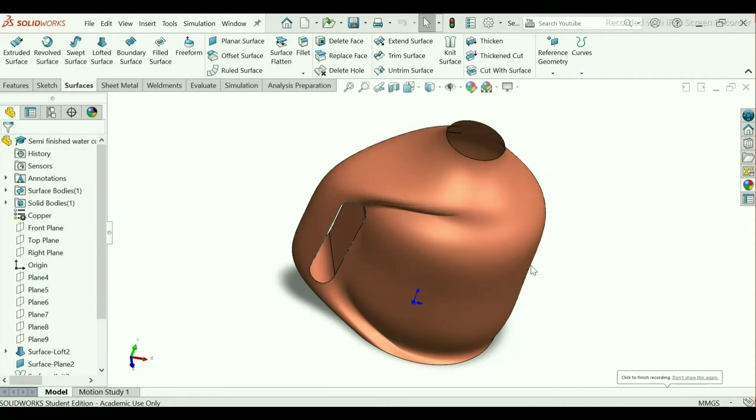Welcome to my channel. Today I will make a semi-finished water container that you are seeing.

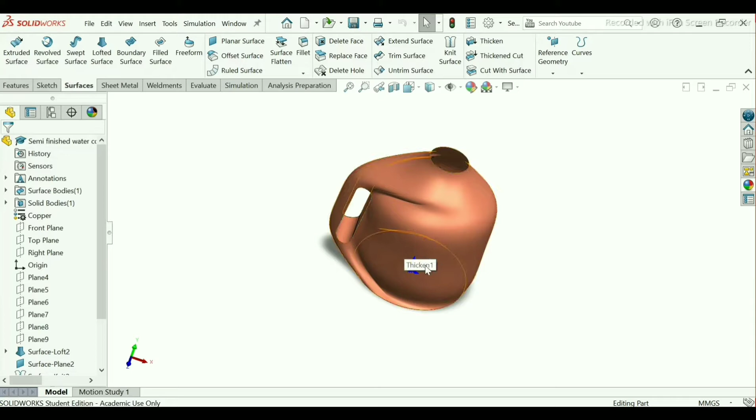In this video I will show you how to use the loft surface command. Here are some planes that I have created, and I will show you the 2D sketch of it like this. We have to draw and create the planes here to make this using the loft surface command.

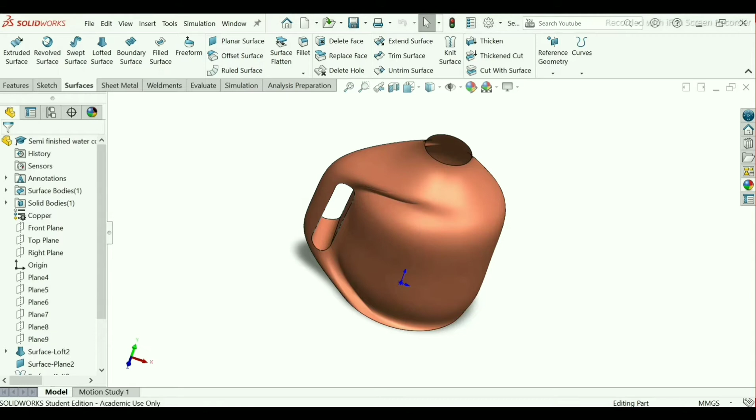If you have seen this, let's start in SolidWorks. Go to new, select part as earlier, click OK. First of all, check the parameters or units. Go to settings.

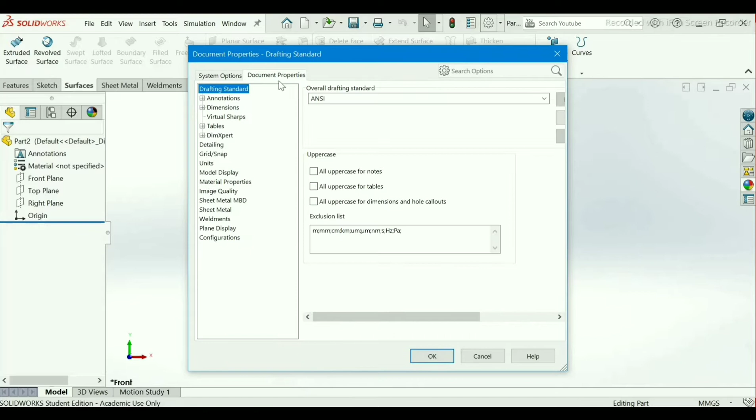Select document properties, units. It will be millimeter gram second. Choose this, click OK. Now let's start.

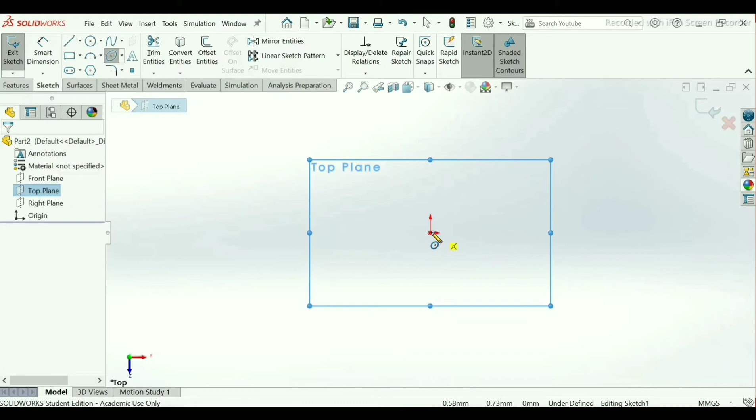Select top plane from the feature design tree, sketch. Now first I will draw an ellipse here. Select center point of origin. Give the dimensions.

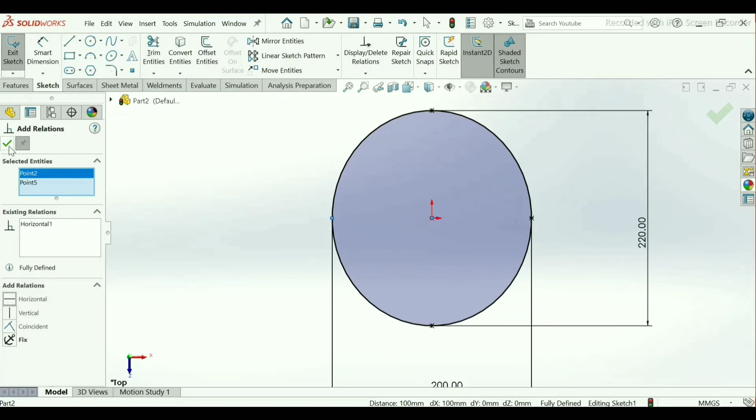Now here we will give add relations. Select this point and this origin point. Make horizontal. Now see, it's fully defined sketch. Click OK, exit.

Now our second geometry will be on reference geometry. Take reference geometry, plane. Scroll down here, take top plane, and here choose 50 mm distance.

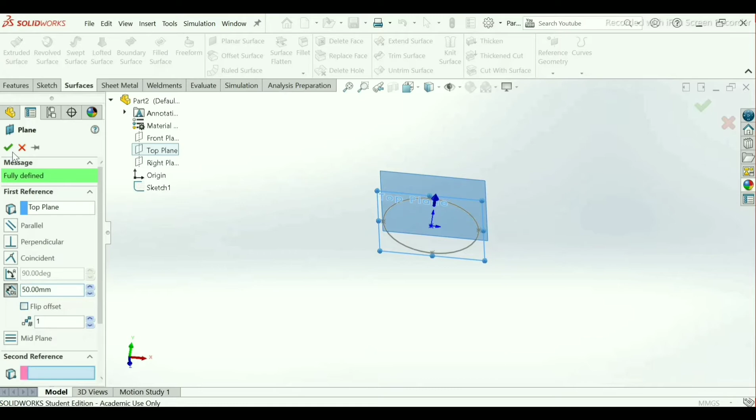OK. Now select this plane, sketch, normal. Choose circle here. We have to make 2 circles here. Only give smart dimensions. Select this circle and this origin point. Remain as it is.

Now go to leaders. See it carefully, go to dimensions, remain as it is, value leaders. See here arc condition, first arc condition will be maximum. Take this, click OK.

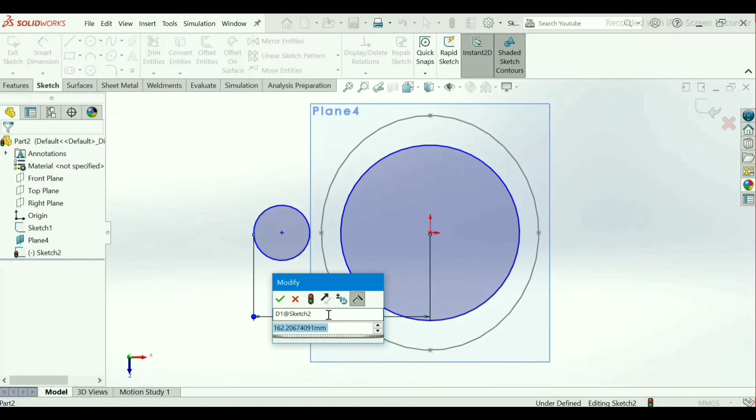Now give it 160 mm. Use smart dimension again. Give it 220 mm diameter.

And this will be, take 38 plus 38, that is 76. Right click on it. You can see here display as radius. Apply it, OK.

Now go to line command. Select this point to this. OK. Again select your line. Press Ctrl Z.

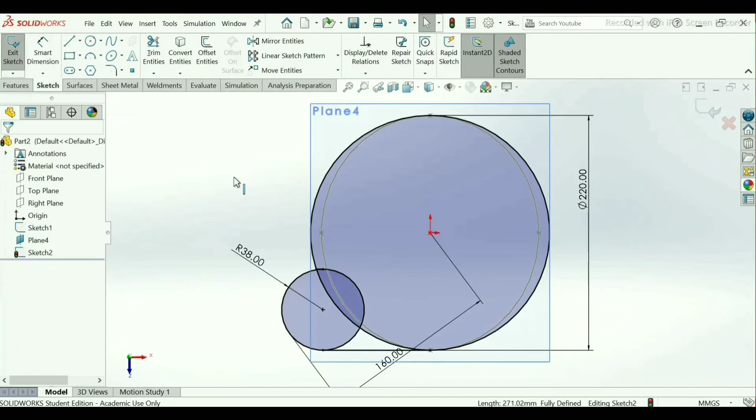Now go to add relation. Select this point, center point of circle, to this origin. Make it horizontal. As you see here, both the circles are now fully defined.

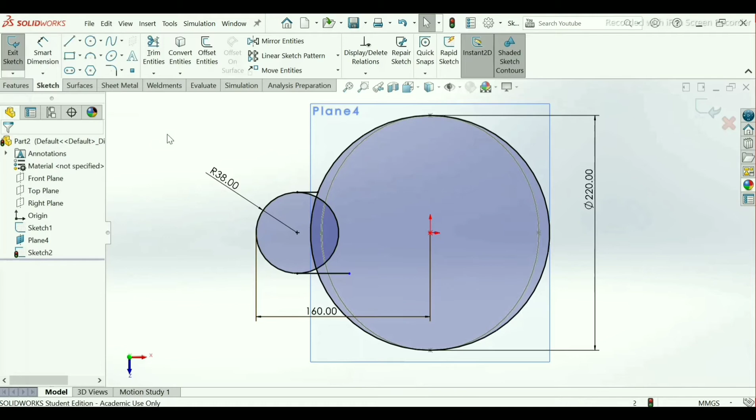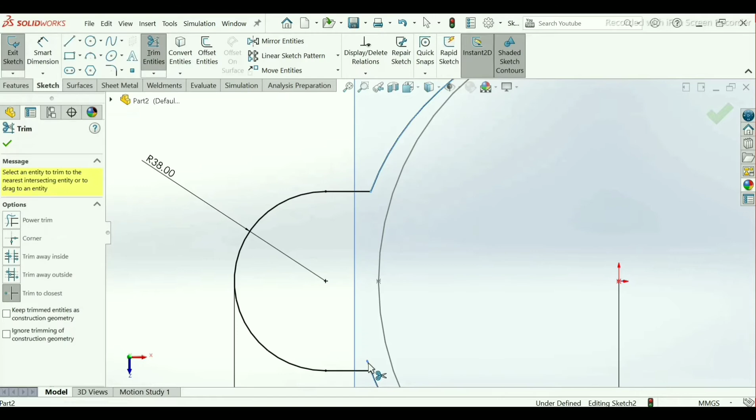Now let's go to trim entities. Select trim to closest. Trim this part, select this, and this. Ctrl 8, press. Now our geometry has closed.

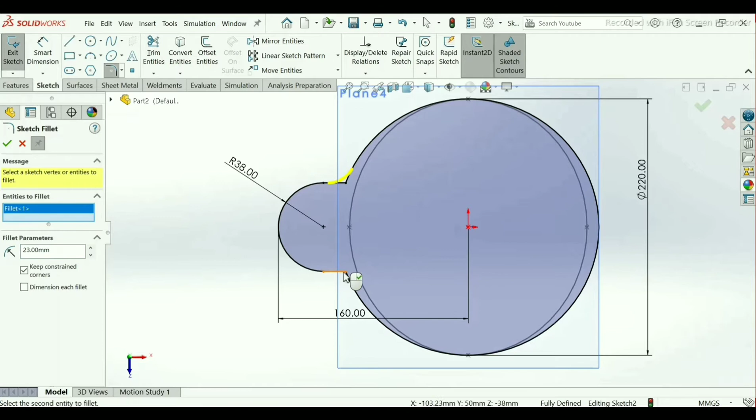Only apply here fillet, use go to sketch fillet. Take a radius as 23 mm. Select this point and this point. Click OK, exit.

Now hide this plane by choosing this plane. Hide.

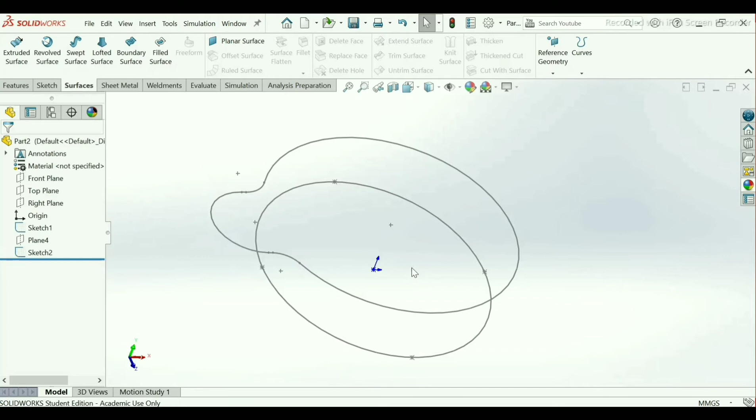Now we have to create here total 8 planes. So go to reference geometry, select your plane, scroll down here, select top plane. This time I will use 100 mm distance. OK.

In our figure you can see section AA and BB having the same geometry here, 50 and 100 mm distance. So we will use only convert entities in our sketch tool command manager.

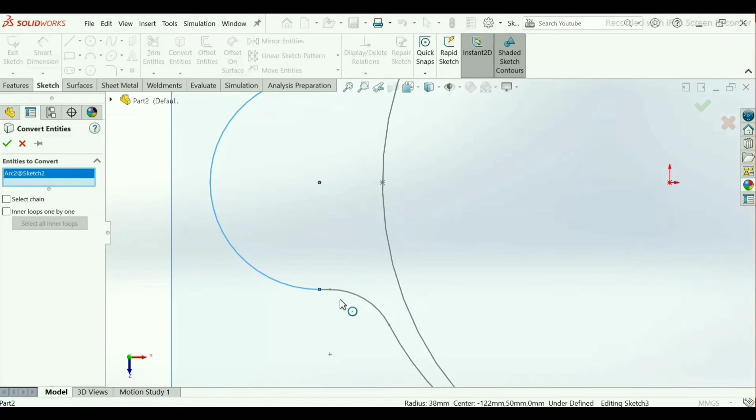So select this plane, sketch, normal to profile. Now use here convert entities. Convert this all geometry. OK. Make sure that the geometry will be closed. Exit.

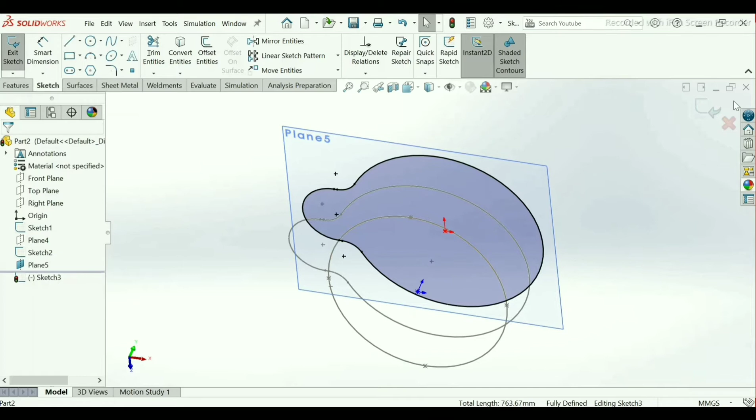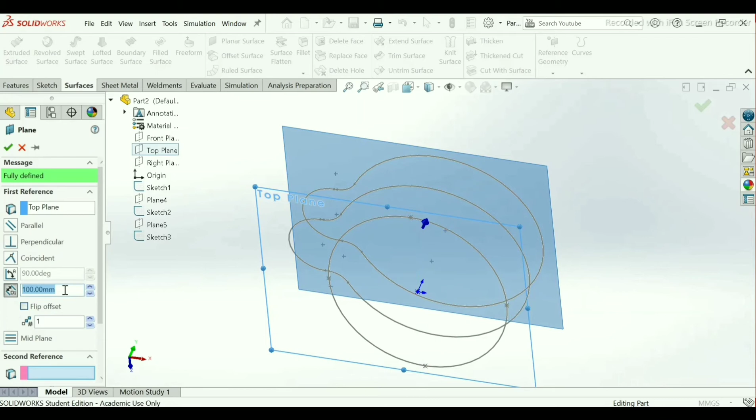Now hide this plane. Again go to reference geometry, select plane, scroll down here, select top plane, take here 160 mm. OK.

Now apply our sketch in this plane. Select this, sketch. Now this time in section E the geometry will be this, as you see here.

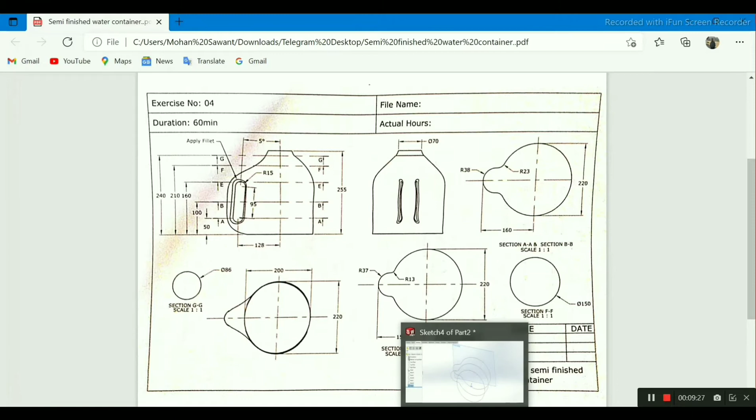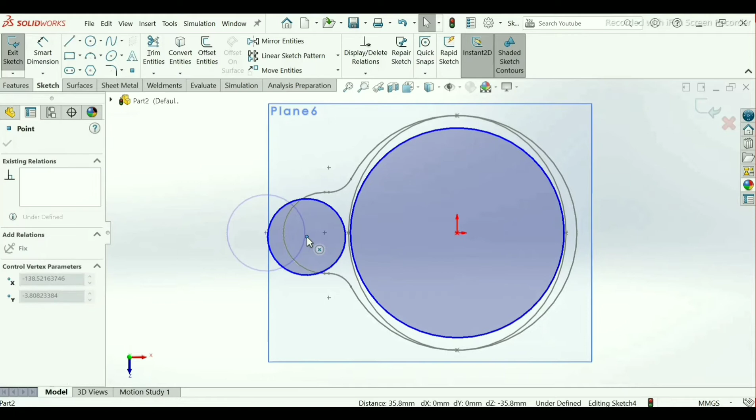Select circle, make 2 circles here. Apply dimensions. Select whole circle, whole circle, and to this point.

Go to leaders. Select here arc condition as maximum. Okay.

Now this time I will make 150 mm distance.

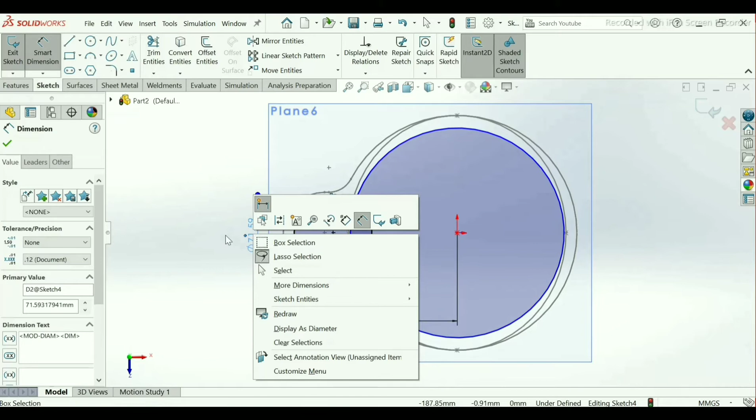Go to add relation. Select this point and this point. Make it horizontal. Okay. Go to smart dimension. Click OK. Our dimension has been selected here, so right click on it or simply close.

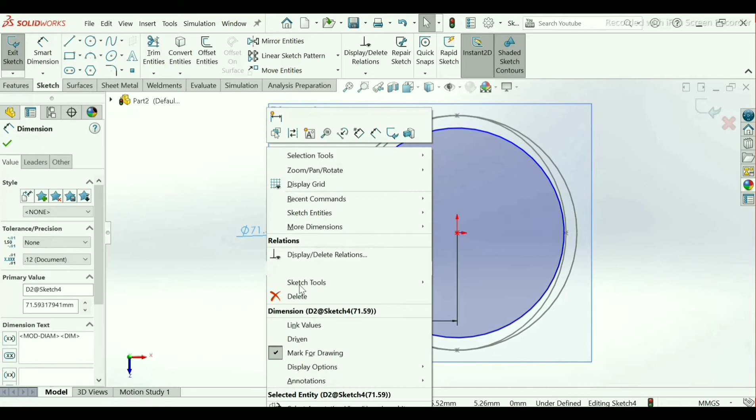Select this dimension, right click on it, go to display options, display as radius. Now make this radius as 37 mm.

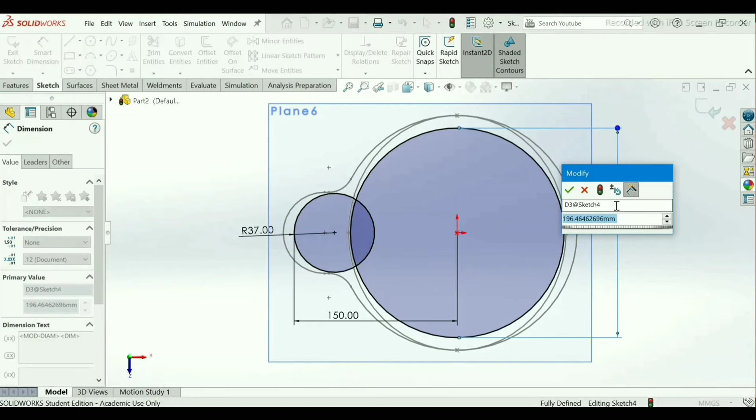Now again select smart dimension, select this bigger arc, make this 220 mm diameter. Okay.

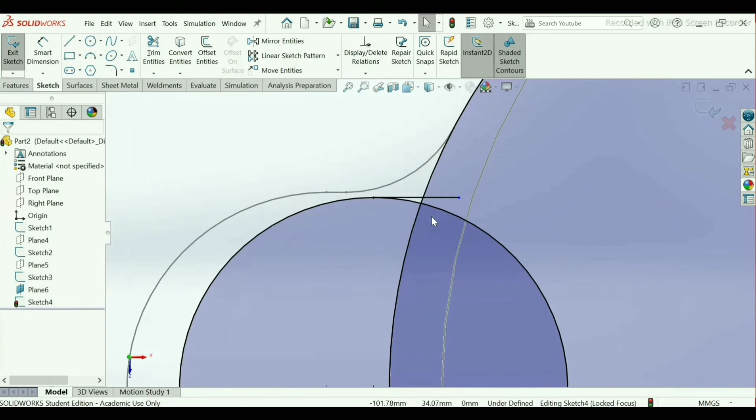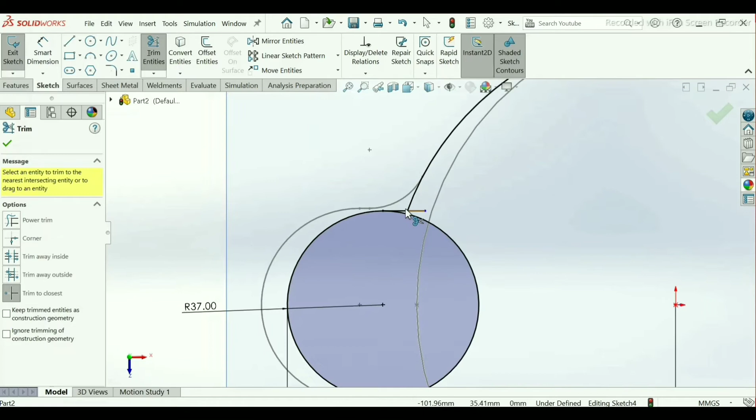Now go to line command, select this point, go to trim entities. See our geometry has now closed, so click OK.

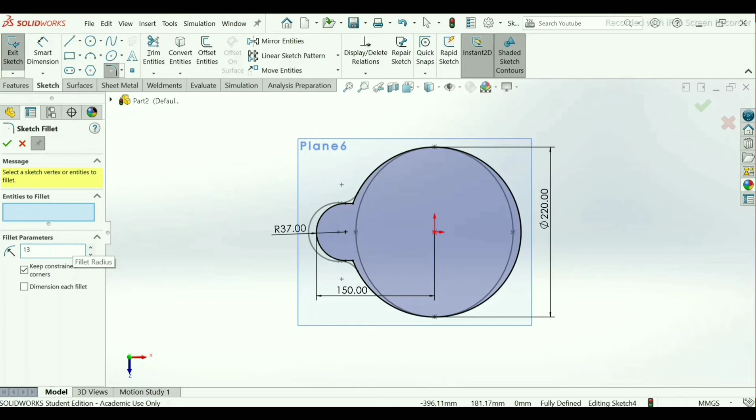Go to fillet in sketch command. Now this time make radius 13 mm, select this point and this point. As you can see the preview, click OK. Exit.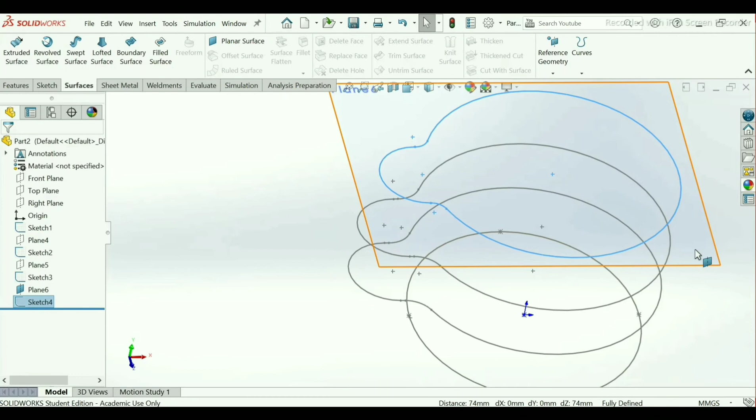Now hide this plane also. Again go to reference geometry, plane, scroll down this command. Now this time select top plane here for first reference, make it 210. Okay.

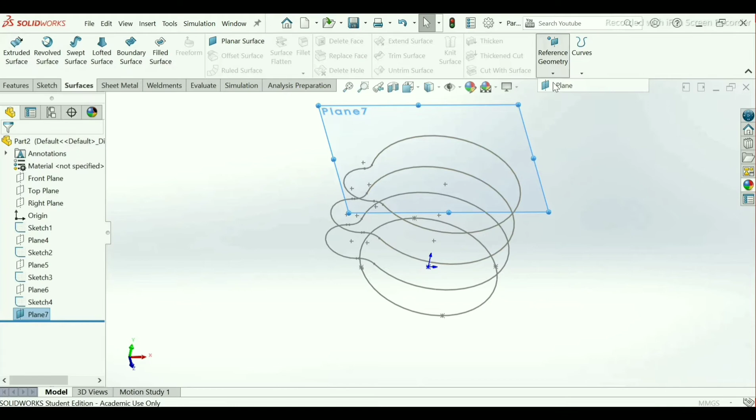Again go to reference geometry, plane, deselect this, scroll down here, top plane, 240 mm. Okay. Hide this plane.

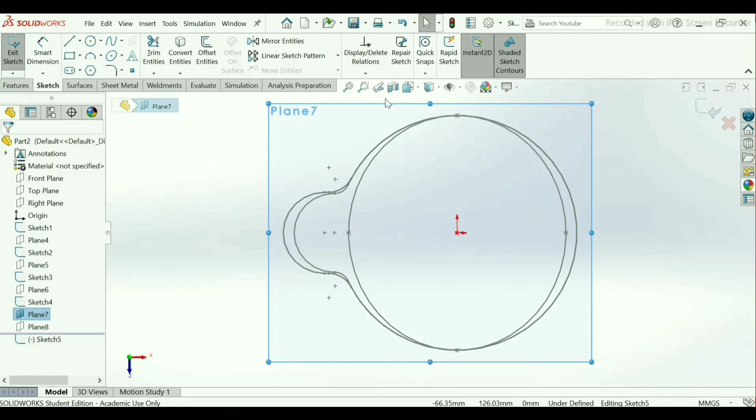Now select this plane number 7, sketch. Make here circle, so go to circle in sketch command manager, exit, use smart dimension, make this 150 mm diameter. OK. Exit.

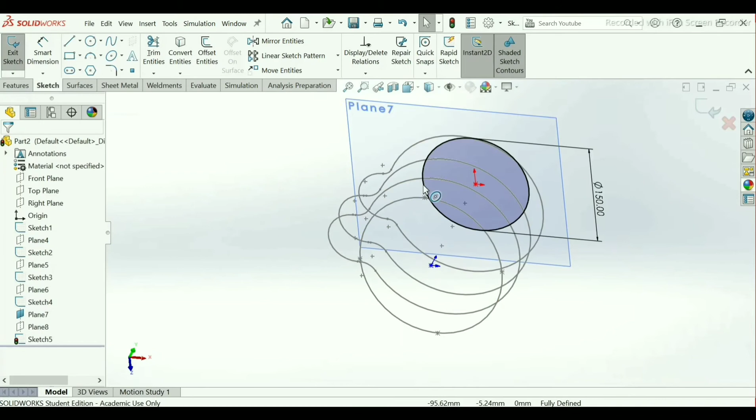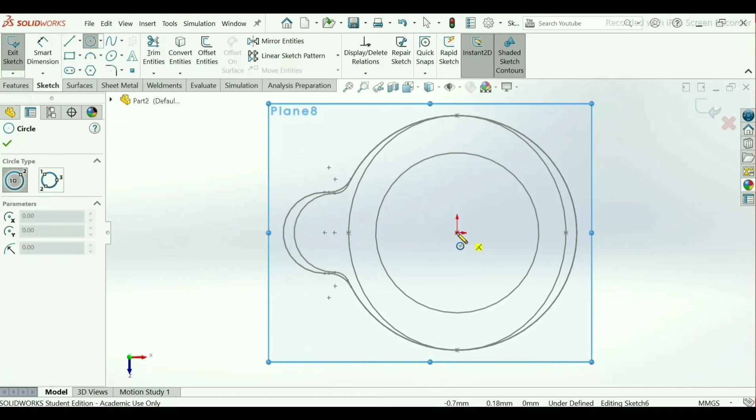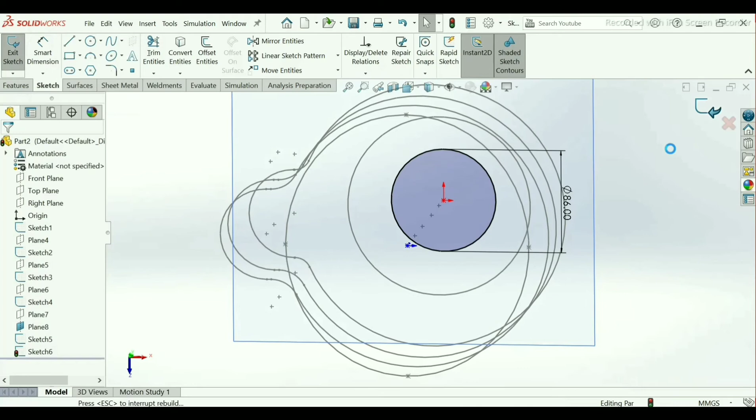Now hide this plane number 7. Go to plane number 8. Select this plane number 8, sketch. Again use circle. Select the origin point. Make your dimensions. Apply here 86 mm diameter. Click OK. Exit. Hide this plane also.

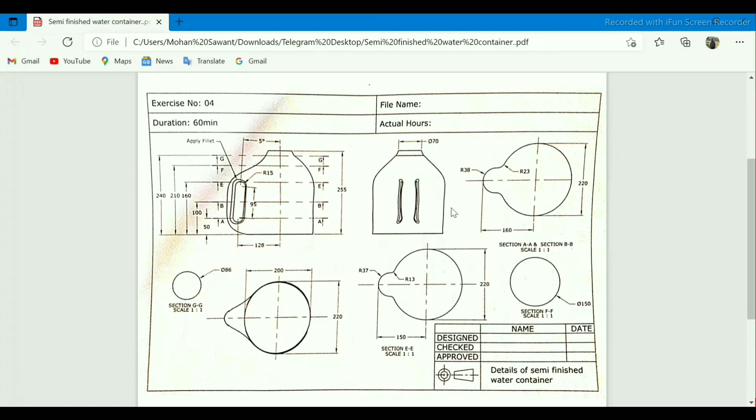Now our last plane. Scroll down this. Select top plane. Height will be now 255 mm height, and here diameter of the circle will be 70 mm dia. I will make it now. Take 225 mm dia. Sorry, not 225, 255 mm height. Click OK.

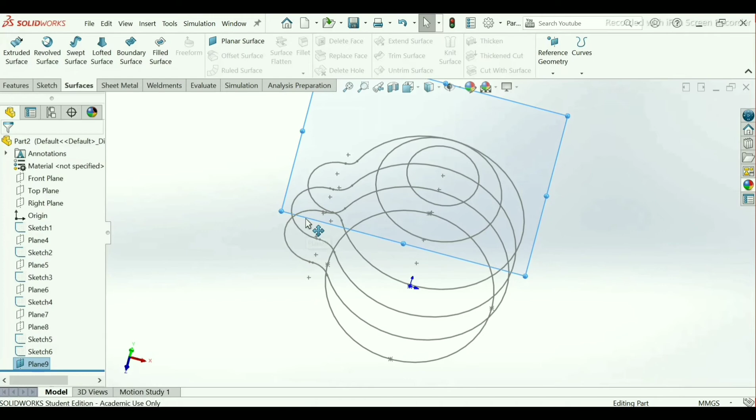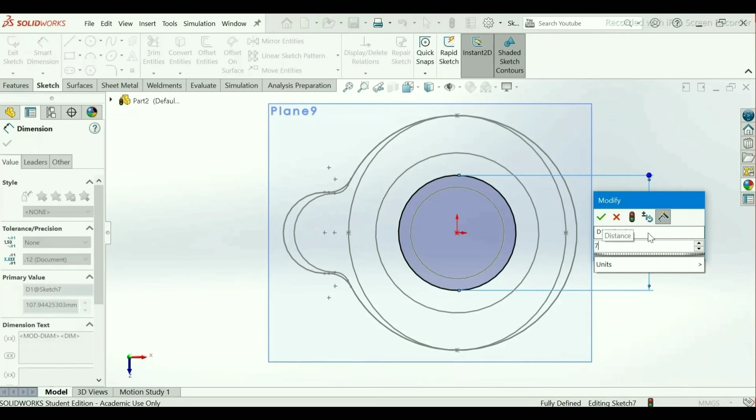Select this plane, sketch, normal to profile. Click your circle, origin point. Now here take smart dimension. Make 70 mm diameter. Click OK. Exit.

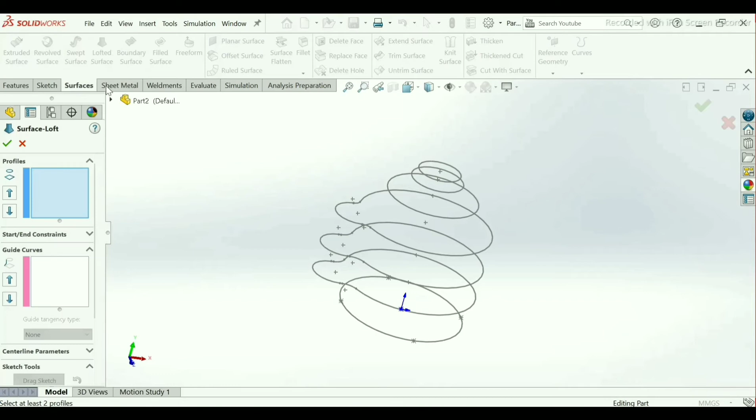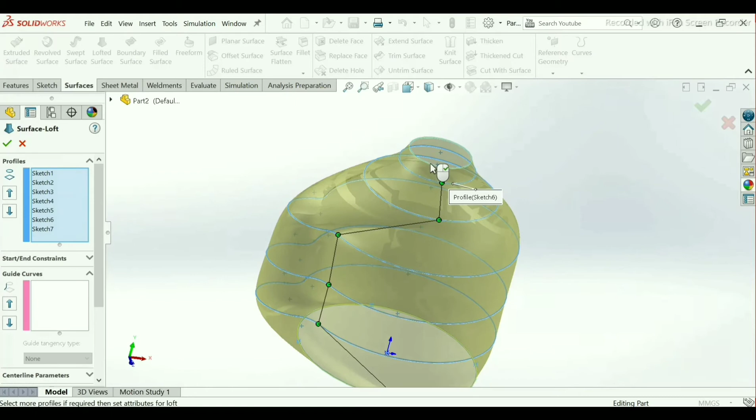Hide these planes. Now our 2D sketches have been made. Simply go to surfaces, surface loft. Select this profiles all. Select this one, this. As you can see, our loft surface has been applied here.

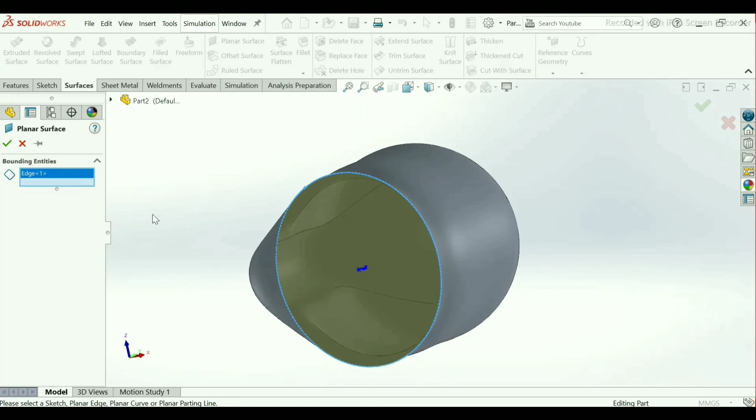Click OK. Here one space is left. We have to fill this by using planar surface. Select the edge only. You can see the preview in yellow color. Click OK.

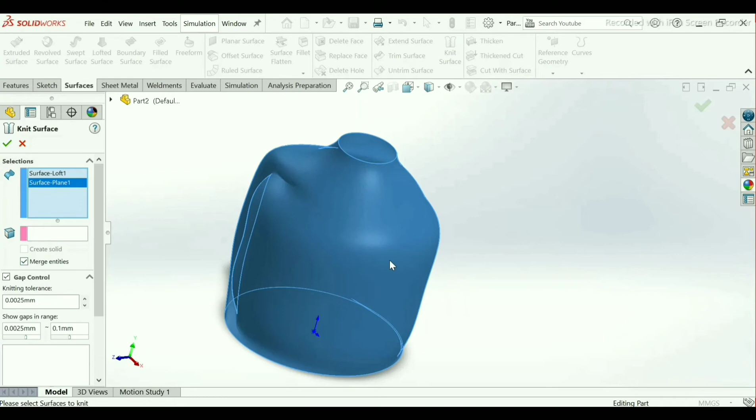Now go to knit surface here. Select all the faces of it, so that we will make it merged. Click on merge entities. Click OK. Now our body has been applied here.

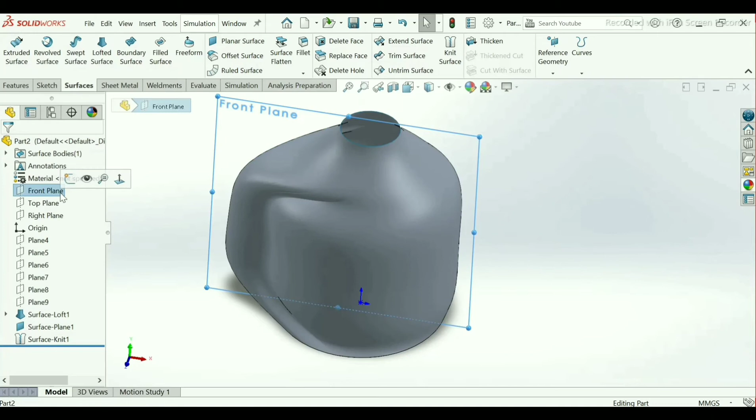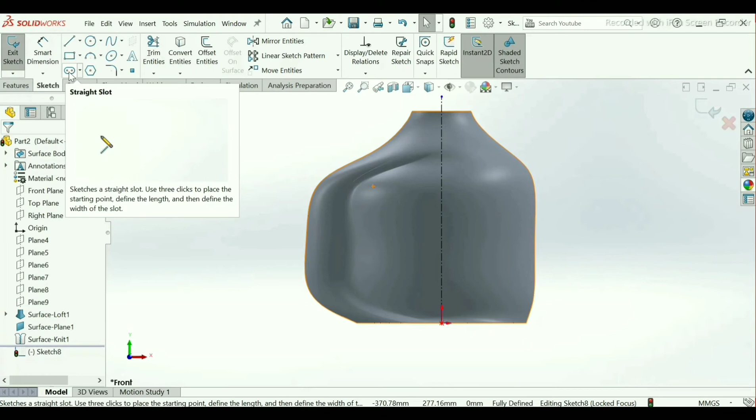Now select the front plane, sketch, make here center line. Go to straight slot. Make here one slot here.

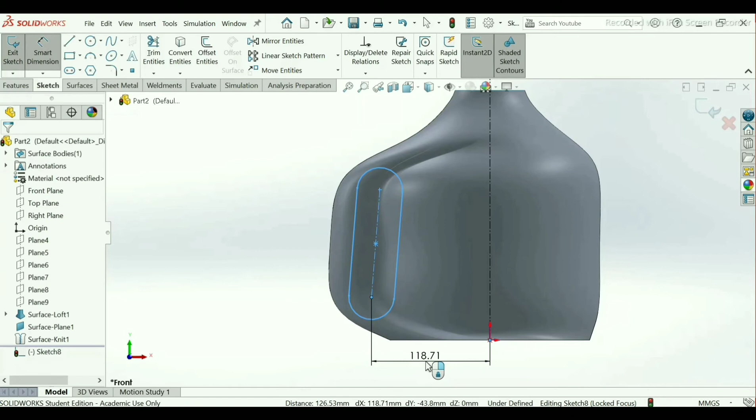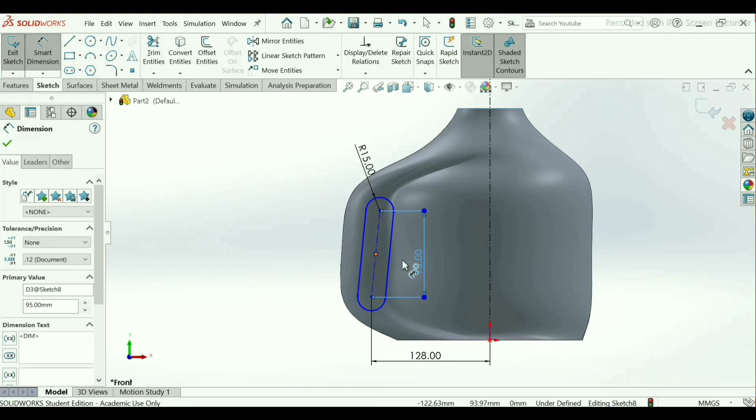Apply the dimensions. Make here 128 mm distance, and the radius will be, take 15 mm radius. Length will be 95 mm. Now select here angle, select this point, center point of straight slot and this center line. Make it here 5 degree.

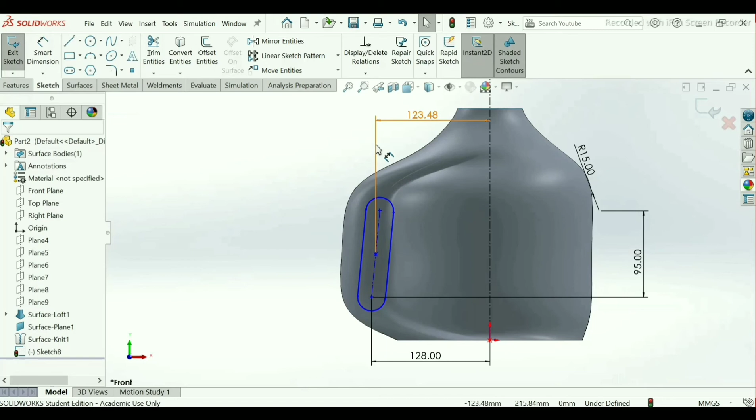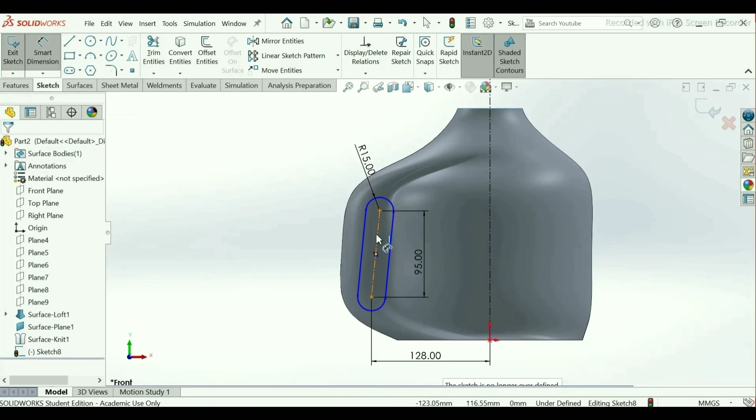Cancel it. Make here 5 degree. As you can see all the dimensions here. So go to exit.

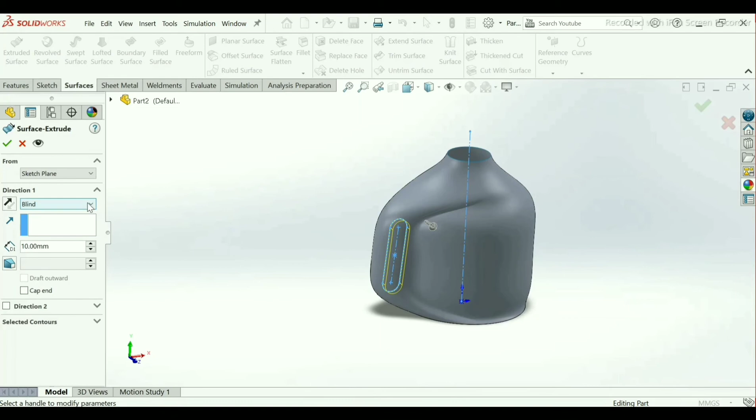Select here extrude surface. End condition will be mid plane. Select 218 mm distance. Click OK.

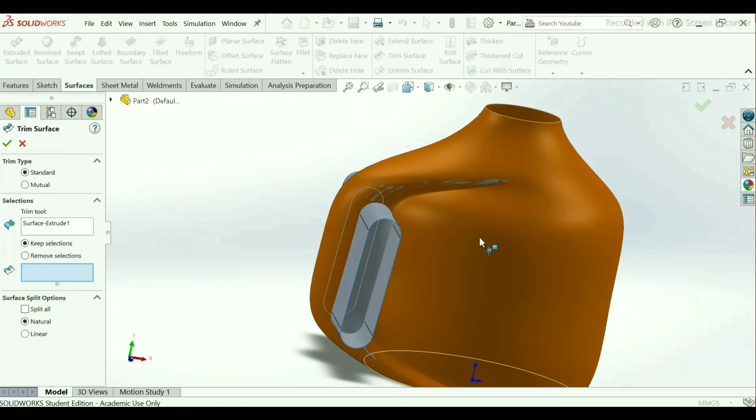Now we have to trim it. Trim these surfaces. Go to trim surface here. Select here keep selections. Click OK.

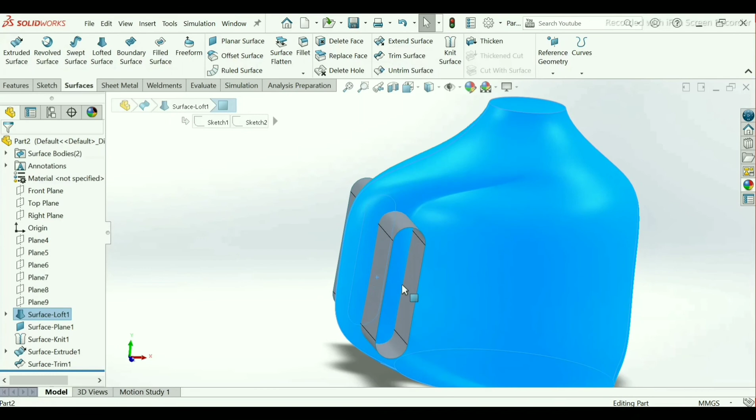It is not done properly, so edit this feature. Select this surface. And this part. Click OK.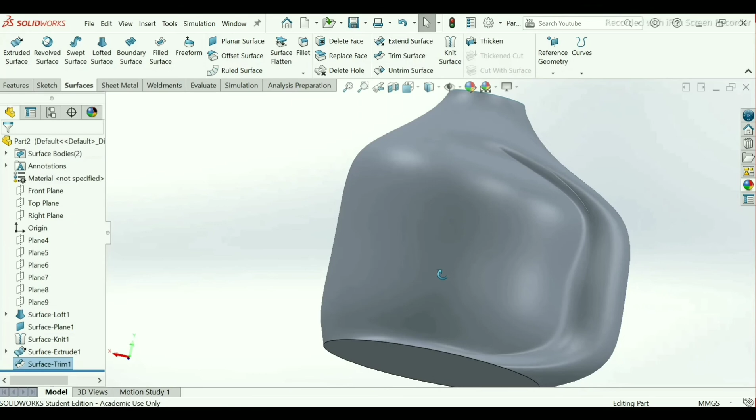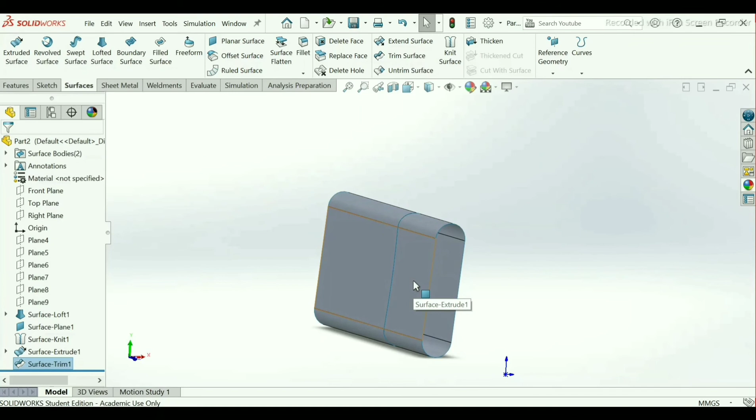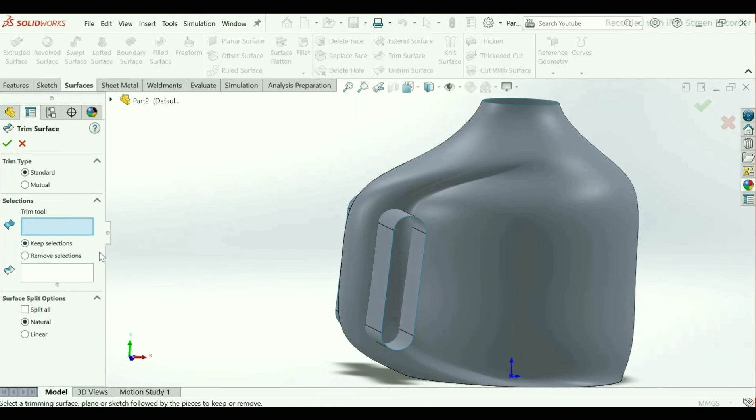Again go to edit feature. Select the surface extrude and the surface trim. Click OK. Now you can see our extrude cut has been done here. Only we have selected this.

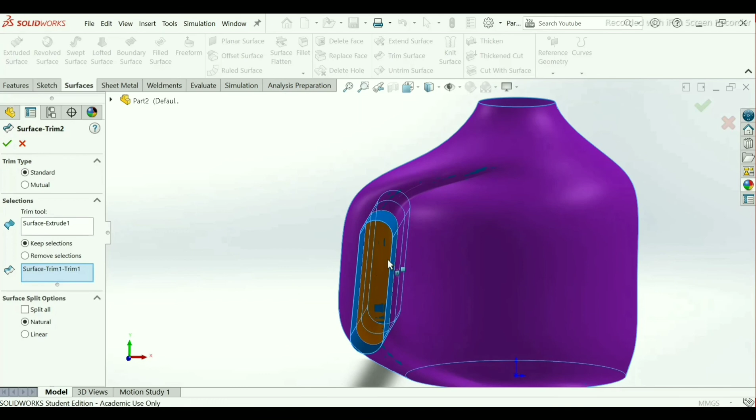Go to here edit feature. As you can see the trim tool will be this body surface extrude and the trim portion will be this, so that it cuts the interior portion. Click OK.

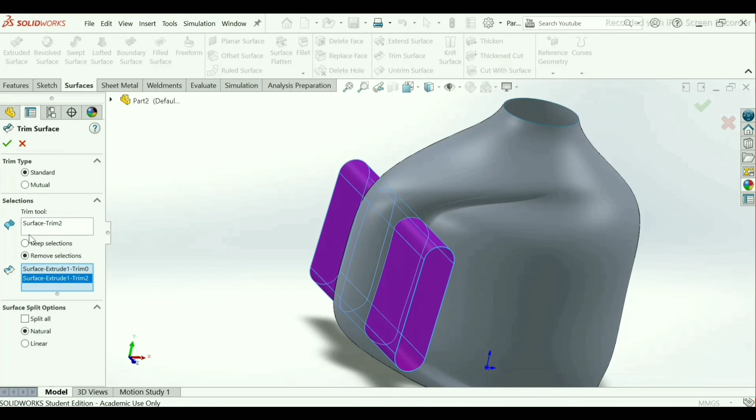Now go to again trim surface. Trim this part. Click OK. Now you can see our cut has been made, as you can see the inside portion.

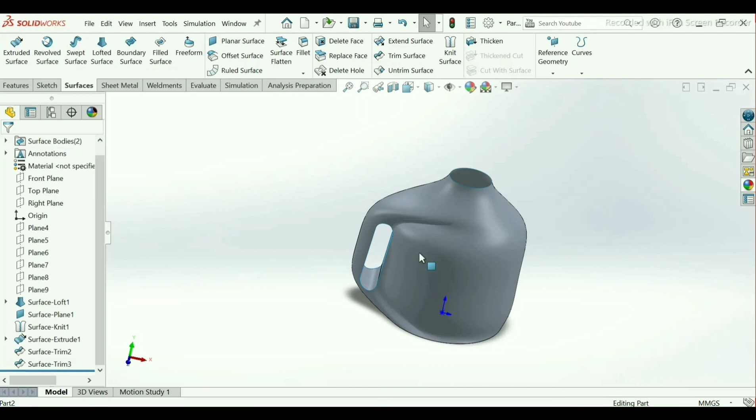Now go to thicken. Add here thickness 0.01 mm. Select this whole body. Click OK. Now it becomes solid, not surface anymore.

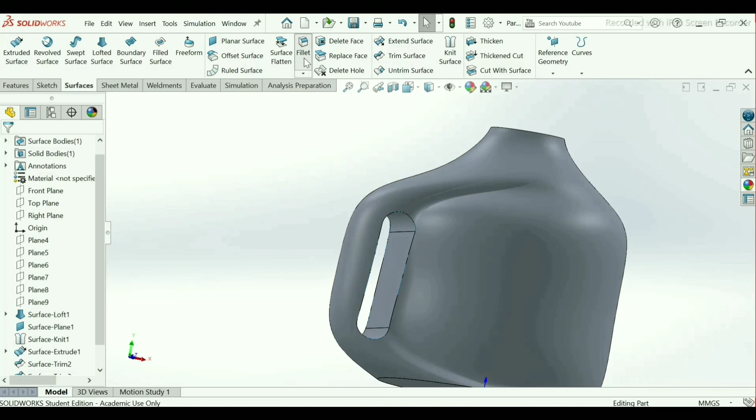So our last tool command, that will be fillet. Go to fillet. Add here radius 15 mm. Select this edge.

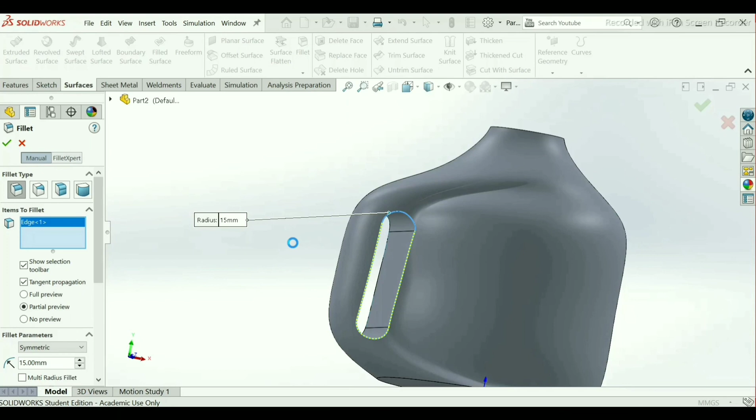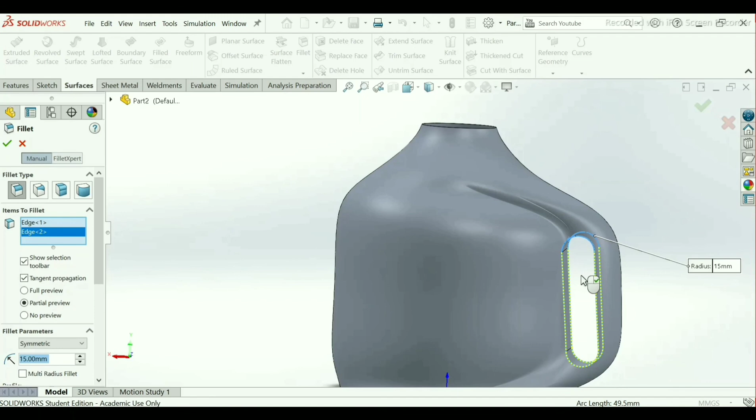It takes some time. Select here edge two. Now you can see the preview. Click OK.

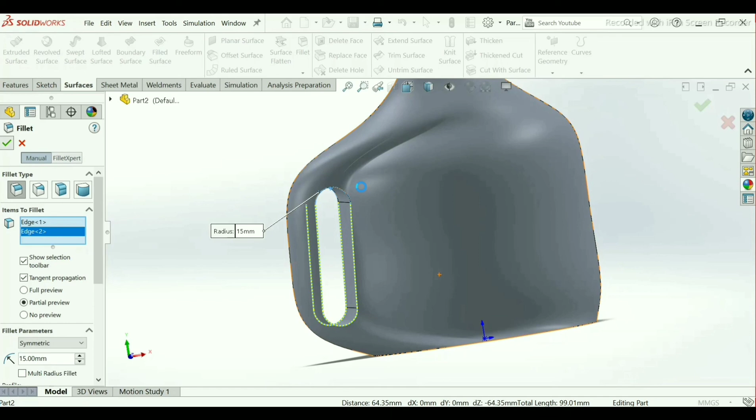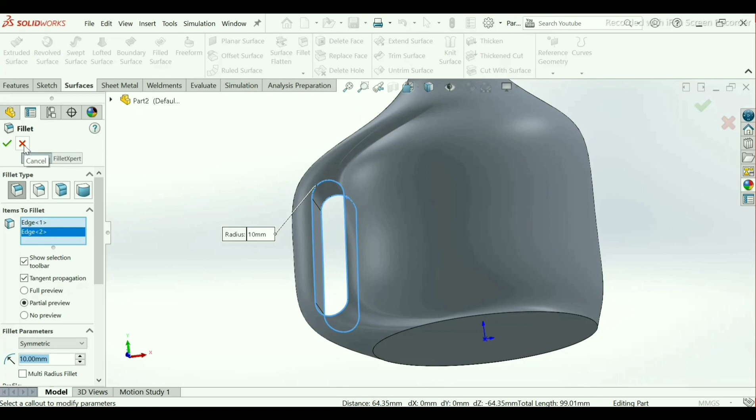Or take 10 mm. If the operation is not doing it, then close it. So our model is completed.

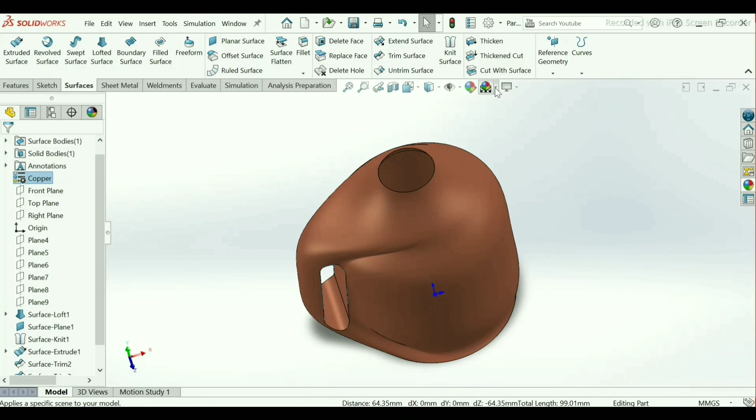If you want to give any material, you can give it by clicking on material not specified on feature manager tree. Select this. I will use here copper. See, it's applied. Or if you want to change the background, you can change it. I will choose plain white. It looks good.